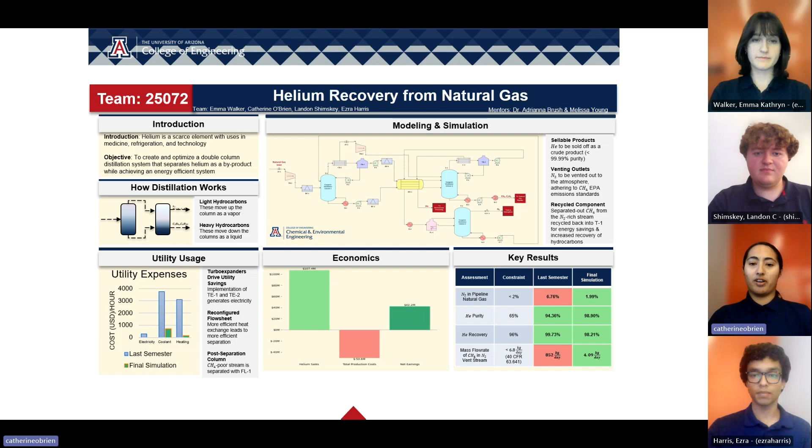Here is our poster. This summarizes key information about our project and gives a process flow diagram of our simulation. And so, our project goal was to design a nitrogen rejection unit, or NRU for short, that recovers 96% of the helium in the feed.

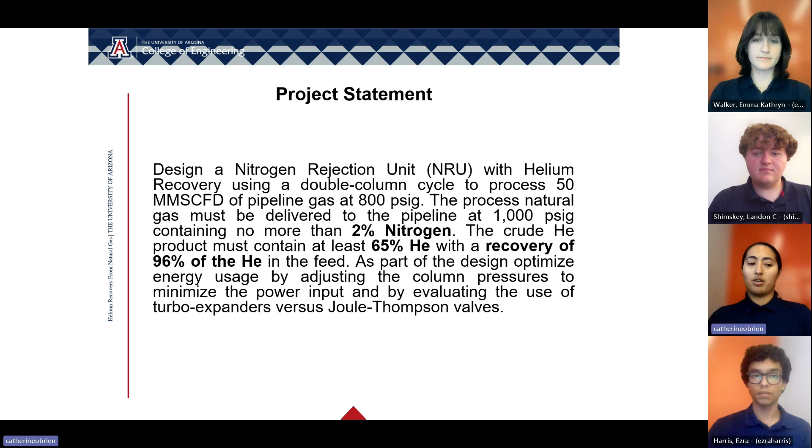The system processes 50 million standard cubic feet per day of natural gas at a pressure of 800 pounds per square inch gauge. So, the gas needs to meet pipeline composition standards of less than 2% nitrogen and be delivered at a pressure of 1,000 pounds per square inch gauge. The helium product must be at least 65% by moles, and we also had to optimize energy use, which meant analyzing column pressures and comparing the use of turbo expanders to Joule-Thomson valves.

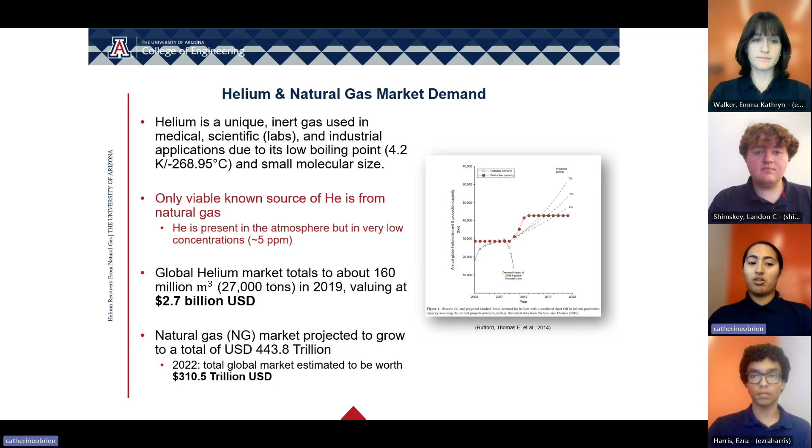So, helium is essential in industries like healthcare, electronics, and aerospace, but is becoming increasingly scarce. Helium is primarily obtained through extraction and natural gas processing, which makes projects like ours both economically and strategically important. As you can see in the graph here, global demand has been steadily increasing, making helium recovery systems very valuable.

So, to make modeling feasible, we had to make several fundamental assumptions, including assuming ideal behavior for some of the lighter components. We based our inlet gas composition on data published by the Bureau of Mines in 1986 and used a sample from an Apache County, Arizona field. Our target outlet gas composition standards were set by the North American Energy Board, and we designed the system to operate at a steady state with negligible pressure drops outside of the core equipment.

These allowed us to focus on the separation goals of our project, in addition to the assumption that all the acid gases have been removed before it enters our unit, and that the equipment is made out of 316 low-carbon stainless steel.

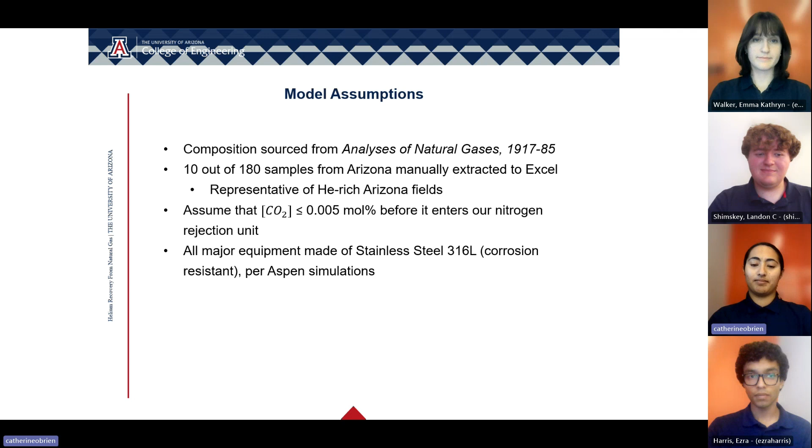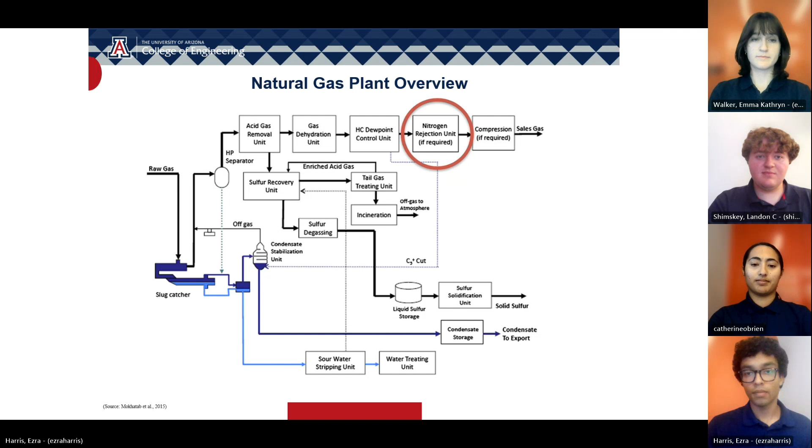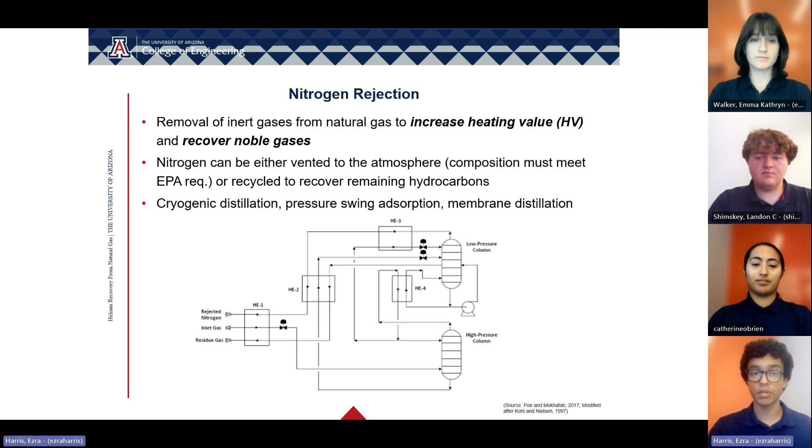In natural gas fields that contain nitrogen, it must be removed to boost the heating value of the gas and recover noble gases. Rejected gases can be either vented to the atmosphere or recycled for other uses. Cryogenic distillation, pressure swing adsorption, and membrane distillation are all methods to achieve this, and all are useful for different inlet compositions, target compositions, or throughputs. We ended up choosing cryogenic distillation because it's the most effective separation method for the scales we're working at.

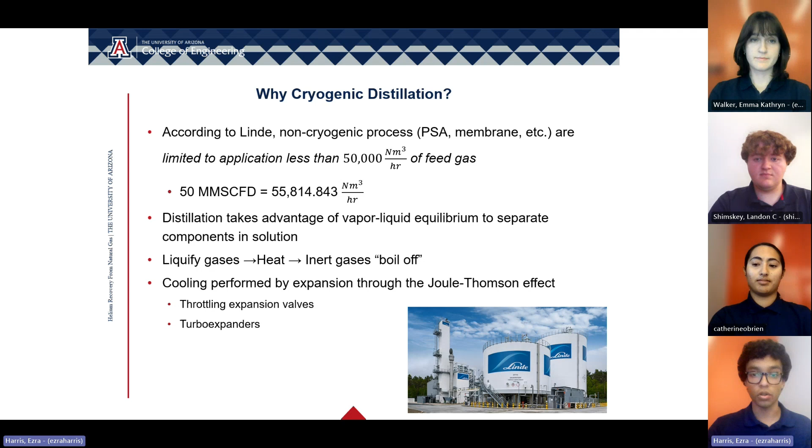Distillation essentially works by taking a mixture of liquids and allowing the low boiling point liquids to boil off first, after which they can be condensed and collected. Cryogenic temperatures are required because all the substances we're working with are gases at room temperature and atmospheric pressure. Cooling is achieved through expanding the gases through either throttling expansion valves or turbo expanders.

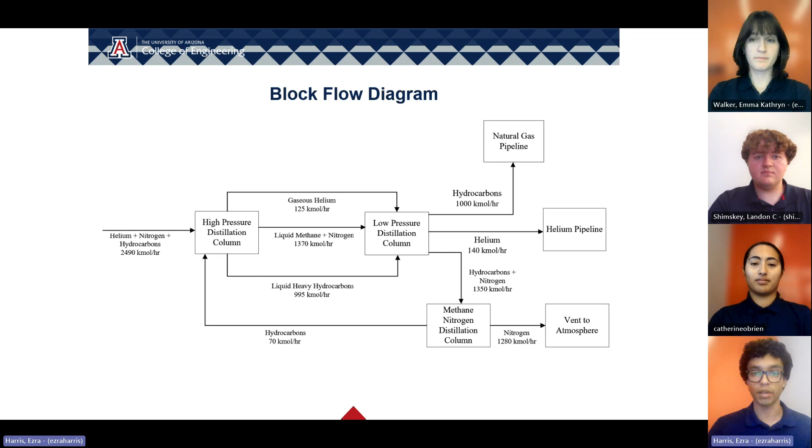And this block flow diagram shows just a basic overview of our process. First, we have feed expansion, which cools the gas, initial separation in a high pressure column, and then a more complete separation in a low pressure column. And the nitrogen vent stream needs to be purified in a third distillation column. The hydrocarbon-rich waste stream or byproduct stream is recycled to increase the composition of all of our products. And then finally, there's product collection.

With that, here's our general process flow diagram. It takes you from the inlets to all our main outlets.

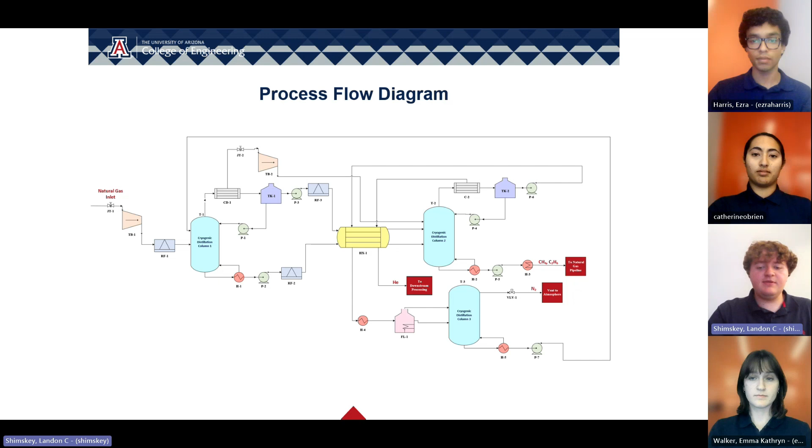We have a third column, which we talked about earlier, which is used to increase our helium recovery and our purity. The system includes turbo expanders to cool the gas prior to distillation and flash drums to pressurize the final product streams. The first column does the brunt of the separation work by separating the really light and heavy components. The second column separates the hydrocarbons from helium, and the third column separates the nitrogen from any leftover remaining hydrocarbons, which are then recycled back into our first column.

However, with our new model, as you see here, compared to our earlier designs, our updated model reduces emissions, improves helium purity, and we've also optimized column pressures to reduce energy consumption while maintaining our required recovery and separations.

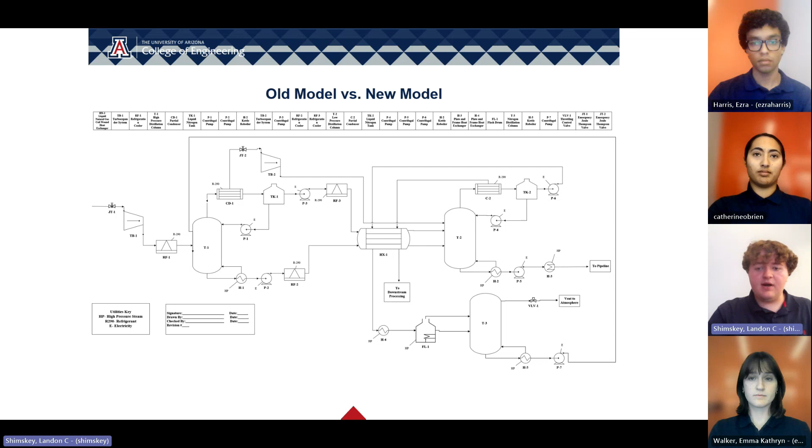However, one of our largest costs from our system is the utilities. We calculate utilities for cooling, heating, and expansion, which are our three main systems. The three main utilities we used were high-pressure steam to heat the three reboilers, which are part of our distillation column, electricity for the pumps to move the liquids between the systems, and R290, which is simply propane, to act as a coolant to cool down our system.

One of the big parts of this system was energy optimization. From this work, we found turbo expanders were far more efficient than Joule-Thomson valves, especially when considering the energy recovered from these internal turbines. As you can see there, we have an electric generation of 670 kilowatt hours being generated from our system.

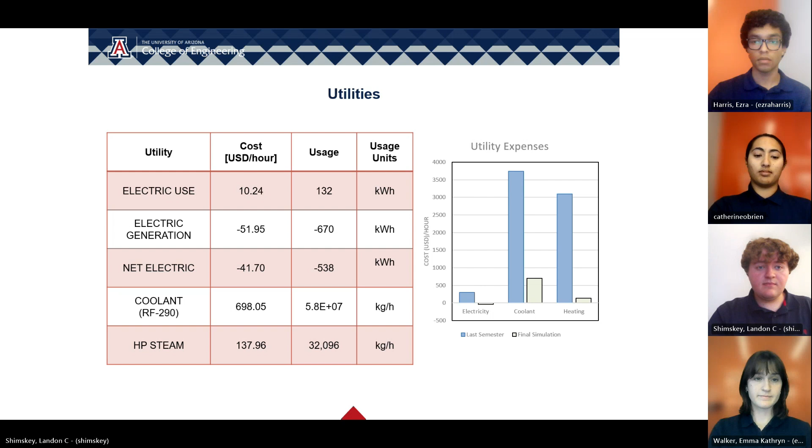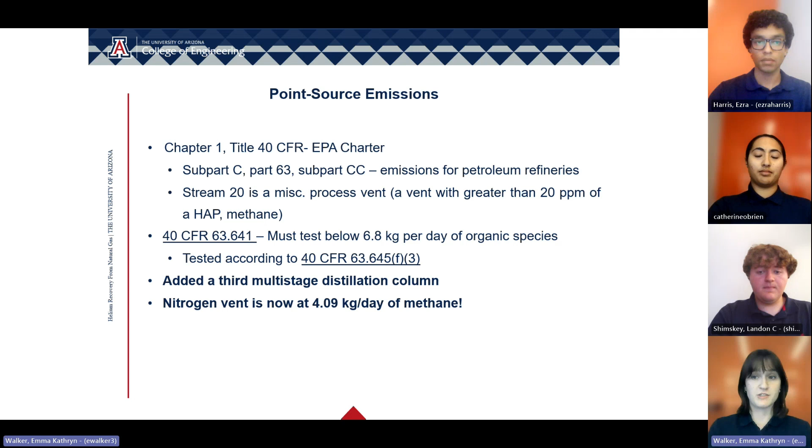Environmental compliance was crucial and one of the largest optimizations the team made this semester for our model. Our nitrogen vent, categorized as a miscellaneous vent by the EPA, originally exceeded methane limits. By redesigning the distillation sequence by adding a third column and the addition of a flash drum to increase the efficiency of the column, we cut methane emissions to 4.09 kilograms per day, well below the EPA threshold of 6.8 kilograms. This ensured our system was both profitable and compliant.

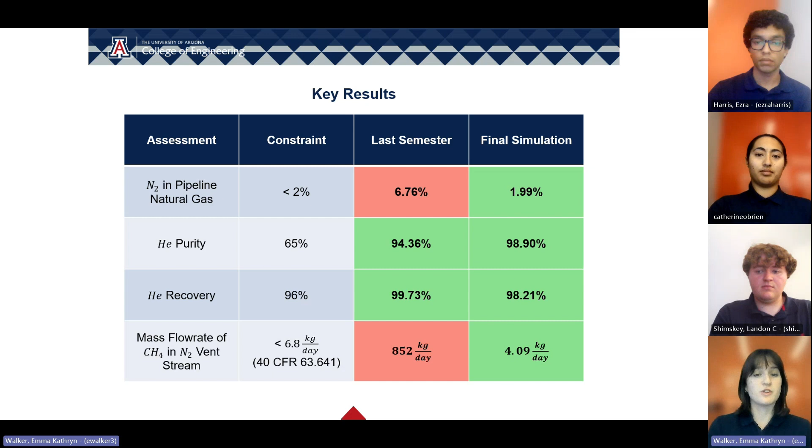To summarize, the nitrogen content in the pipeline meets pipeline specifications, and with the recycled stream, recovery of hydrocarbons increased through optimizations done this semester. Helium purity and recovery were beyond the design targets both this and last semester, as the team was trying to reach grade A helium standards, which is discussed in the next slide. The nitrogen stream is now vented safely with minimal hydrocarbon losses. These results meet and exceed all design targets.

We recommend that future designs explore a broader range of inlet gas compositions to identify the most profitable feedstocks. We also suggest adding a PSA unit to further purify helium to grade A levels. The sales of crude versus grade A helium showcase the 4 times increase in profit if we were to reach this standard of helium. The team did explore a cryogenic PSA hybrid system with the PSA at the end, but learning a different chemical engineering software, Aspen HYSYS, brought on a bigger challenge than expected. We were already well above the constraint for helium purity, so we decided this was satisfactory for the time being.